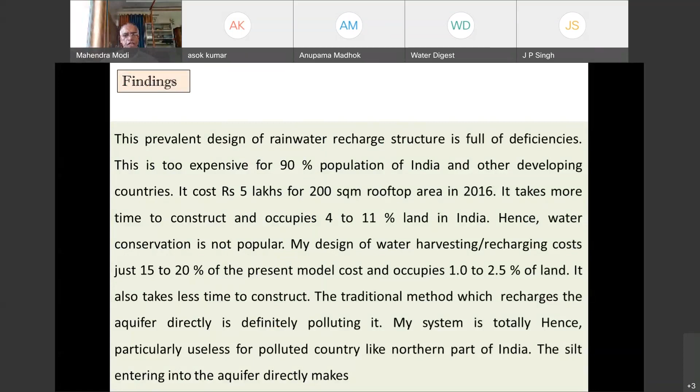But this has been prohibited by the Honorable National Green Tribunal and the Groundwater Regulation Act of different states. Why are there disadvantages of this system? What are the disadvantages?

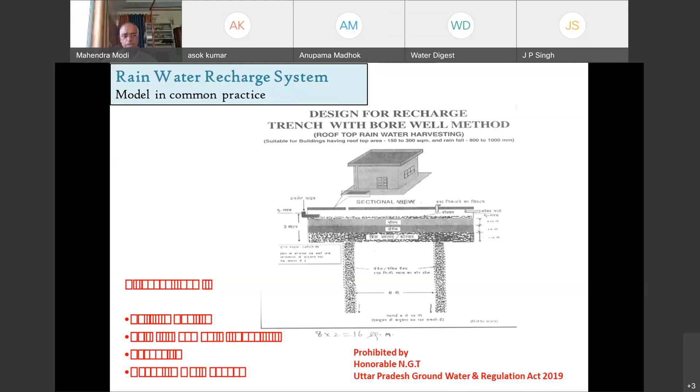In this system, I recharge rainwater only, nothing but rainwater. We recharge only rainwater. Where do we recharge it? The depth is 9.5 feet below. It's not recharged from one direction but from 5 directions. The rainwater recharges not only vertically downward, but also in all 4 horizontal directions outwardly.

This is possible by making the system in such a way, which I have developed after practical experimentation for the last 15 years or so.

Now, this system eliminates the possibility of making the aquifer polluted. It prohibits acid rain, harmful bacteria, any kind of bird droppings, any kind of insects, and any kind of soluble chemicals.

Now after that, whatever silt is deposited in this small chamber - there are two chambers. The small one, I have to desilt only the small chamber.

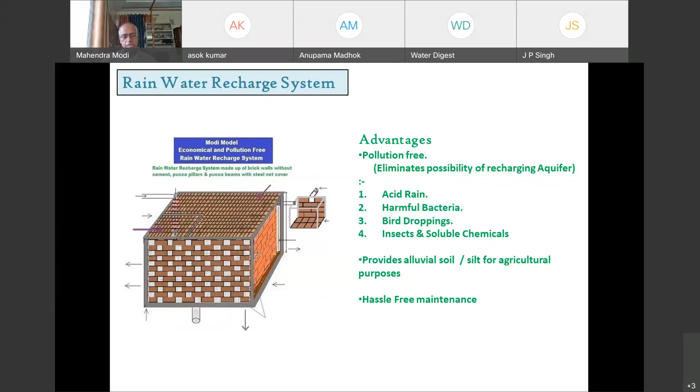These are practicals. Here on the left-hand side, you are seeing this - it is already functional at Police Enclave Vibhuti Khand, Lucknow, India. Now the main chamber is here, here is the small chamber, here is a chamber without using cement - it is made only of bricks. Bricks will be on the ground of the small chamber only. In the larger chamber, on the ground, there are many innovations.

Now you can see this water - this is the photograph taken in May. And in May and June also, the water level is 10 feet. It means if you take a bucket and add a rope of 11 feet, you can fetch a bucket full of water. So this is the level of water.

And this is not only in Lucknow, this is also in Jhansi and at hundreds, even 300s of places wherever I have started this model. Now on the right hand side is Mr. Ranjan Kumar, Divisional Commissioner, presently of Lucknow. And this system is again at Lucknow.

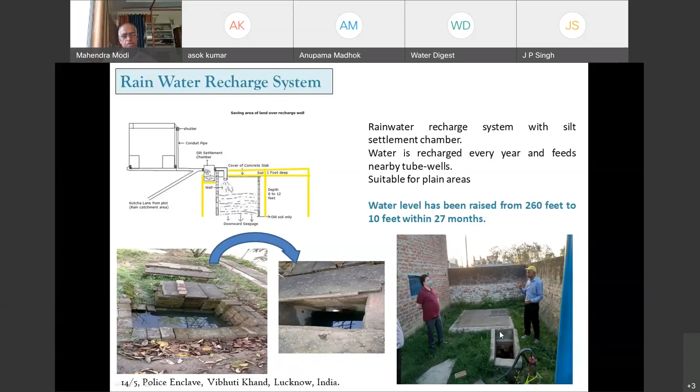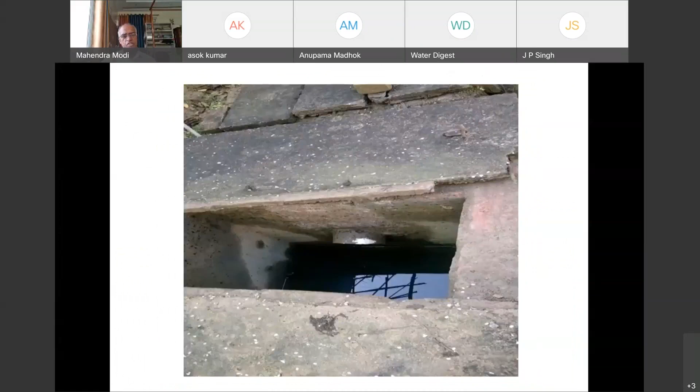And then we are coming to another model, that is in the Technical Services Headquarter, the Forensic Science Laboratory Headquarter at Lucknow, where in approximately 1,43,000 square feet area, I returned the government money, almost 45 lakhs back. And then just by Shramdan, within 15 days, we started 95% water recharging.

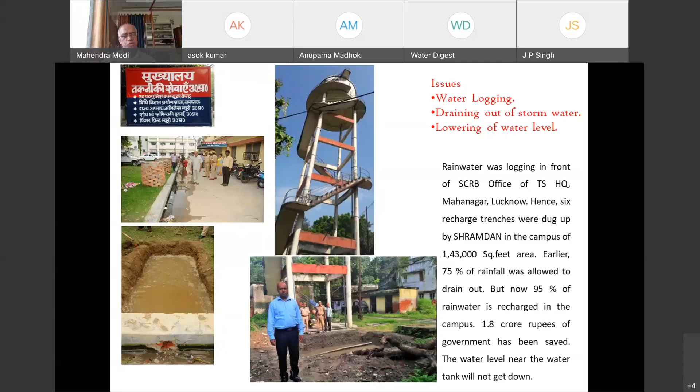This is Sakrar, Jhansi, Gausala, 15 acres of land that was barren. Now it is lush green just by recharging, with the help of Shramdan. So it can do wonders.

Then we have the system of wells revival. Another model I have is called Mahendra Koop, Maha Indra Koop. Koop means well, and Indra is related to the god of water. You can see this was a dead well earlier, now water has come up.

There are 3, rather 4 models, according to the composition of soil. In the Mahendra Koop model, there are 3 kinds of minor modifications, so according to plateau area, hilly area, or plain area, this varies.

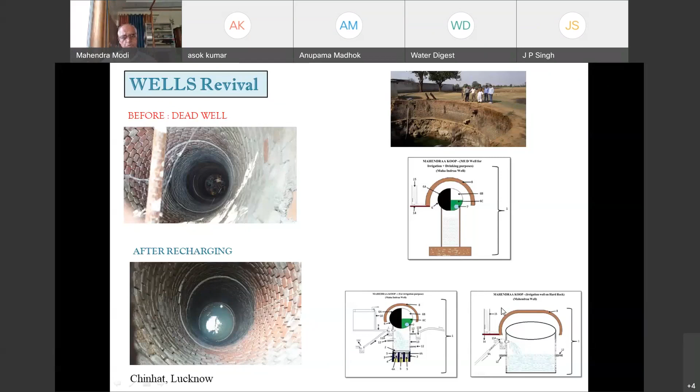You can see this well was dried up for almost 18 years. It got cleaned up, and after cleaning, this is the model. Then trenches were made around the well. This is the new revived well, providing water for all 365 days, and this happened in just one monsoon recharging.

Why this success? Why is one monsoon recharging sufficient? Because around the well, 3 trenches have to be dug up, and all the water in the lanes passing beside the well, after making bunds, the rainwater is stopped there and recharged into these trenches.

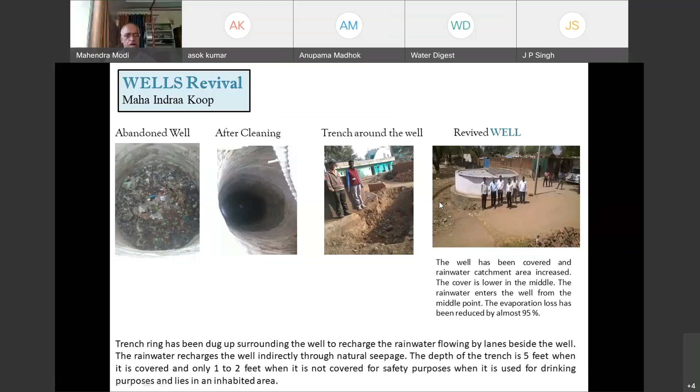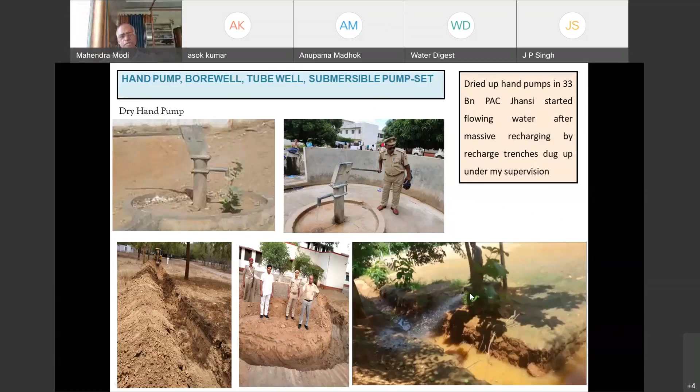Now, what precautions should we have while making a trench? The trench nearest to the well, nearest to the hand pump, will be almost 5 feet deep. But the added linked trench can be just 2 to 3 feet deep, and it should be able to stop all the runoff of rainwater passing through it. It will collect maximum time and recharge the nearest vicinity of the hand pump.

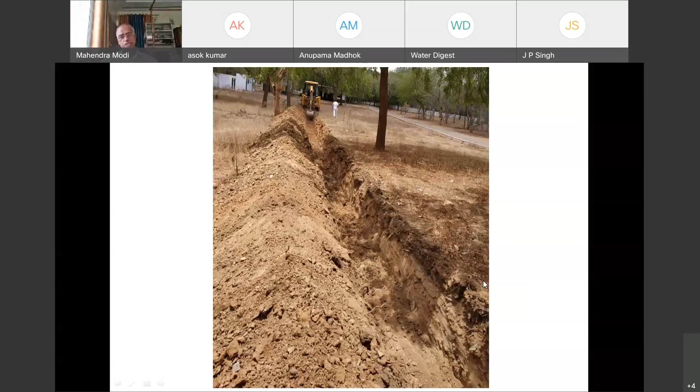There is Paris Accord signed in December 2015, dedicated to arresting global warming, reducing the temperature of the world by 2 degrees Celsius or 1.5 degrees Celsius as compared to the pre-industrial stage. Naturally, it is a huge, ambitious task, and this calls for cooperation from not only governments of India and states of India, but also of the world.

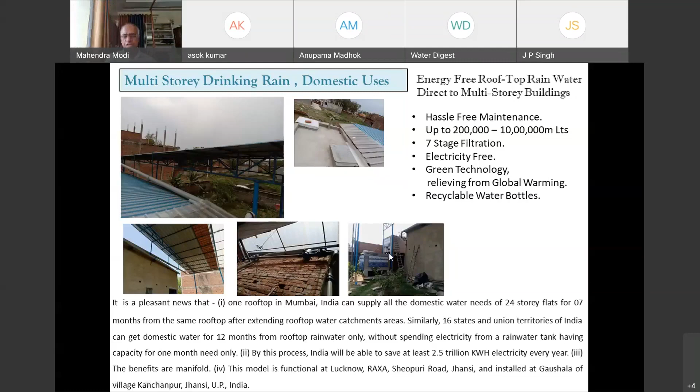हम यहाँ पर नेक्स्ट उसी को बढ़िया से दिखाने जा रहे हैं कि अगर मान लिया जाए, आप दिल्ली की बात करें, Delhi has an area of 1484 square kilometers, having an average rainfall of 61 centimeters per annum.

Now, if we see the population of Delhi to be around 2 crores or more, whatever water falls in Delhi, if we collect according to the advice and slogan of the Honorable Prime Minister of India, catch the rain wherever it rains, when it rains, then each and every citizen of Delhi should have 70% more water than he needs. Now, this model is my model in the sense that I will tell you...

Because we are not extracting groundwater, but with the help of gravitational pull, we are collecting it. These are the collection pipes. Then this will go to the water tank.

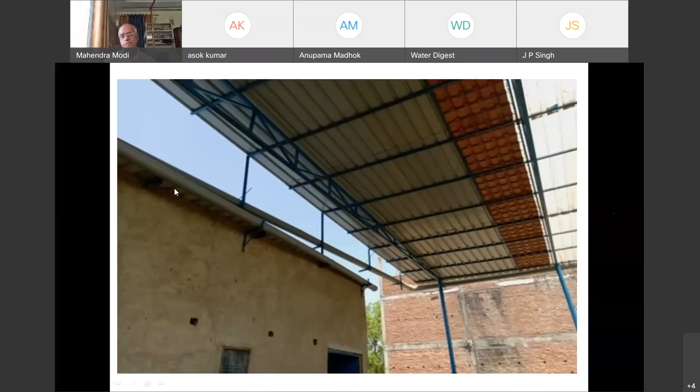Now, overhead tanks all over India have one design. And what is the design? The rainwater falling over the overhead tank goes waste to the ground. We do not collect it.

But here in this model, there are so many innovations. Number one, all the rainwater, that is 80% of the rainwater, because I have 3 parts in the tank, T1, T2, T3, 3 chambers of the rainwater tank. Now, chamber number 1 and 2, all the water falling over chamber 1 and 2, that is 80% of the falling rainwater, will also be collected inside the rainwater tank. And this is the tank.

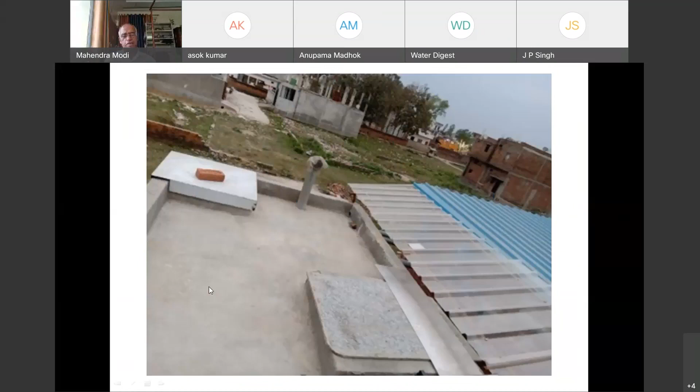Now, to give a closer picture of it, here is the rooftop of the rainwater tank. This rainwater also gets collected from this place. Before that, I throw out the acid rain, and I tell you here,

yes, this is the filter and valve. The valve throws out the waste drain also and dirty water. After that, 10 micron filters are there. Then after filtration, the water goes inside the tank.

Inside the tank, again, there are so many innovations, some to clean it further. Before falling into T3, that is tank number 3, again there is an FPO, that is a chamber having a sand filter, which is not needed, but a carbon filter is needed, so carbon filter is there. Thereafter, in the last stage, drinking water will be made after passing through the UV filter, that is ultraviolet filter. So here will be the ultraviolet filter, and then this is drinking water.

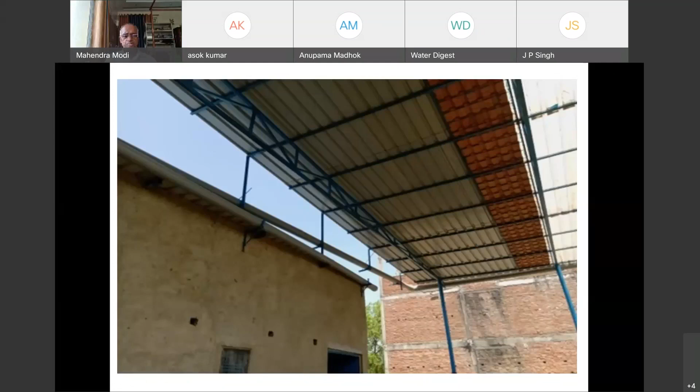The chamber has a capacity of 15,000 liters. That is the capacity of 1 month's water for one family, drinking water and all kinds of water. So here is a lesson for those companies who extract groundwater for making mineral water or bottling water. For bottling water, I am providing employment opportunities to young men.

This is the model. Just now, during the lockdown period, I have made and constructed it with my personal resources and with the help of some friends and some Shramdan also. So this will be drinking water in recyclable bottles. So it will be a totally green movement. And this has to be done and followed all over India.

Why all over India? Because if this system is applied in every building of India, it is applicable all over India or even all over the world. If we do so, in India itself, according to preliminary estimate, 2.5 trillion kilowatt hours of electricity will be saved.

Why am I putting emphasis on saving electricity? Because though the Honorable Prime Minister has made efforts for green energy and solar energy, even now 61.5% of electricity used in India is thermal power. Out of that, 53% is from coal, and coal is very polluting. We have to arrest global warming and pollution. This thermal power, especially coal, diesel, gas or lignite power, is adding to global warming, and we have to reduce it.

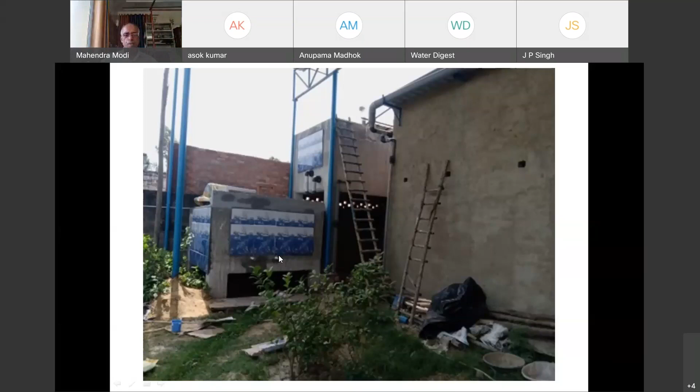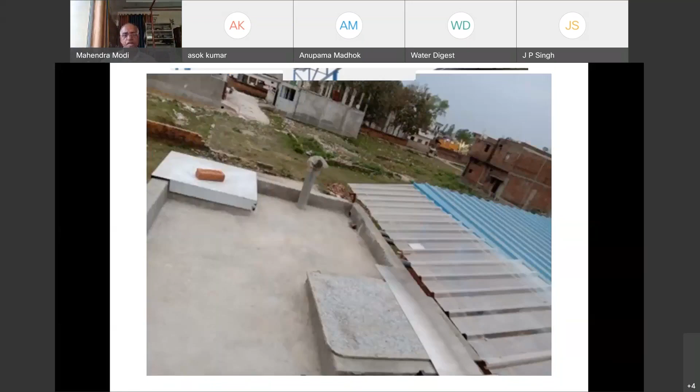Now I'm switching over to another model. One may raise the question that this is as good as RO water or distilled water. Agreed, but this is not harmful, and it's not tasteless - it's very tasty water. And if you want minerals, why not have natural minerals? We can have mineralization, but I'm not suggesting that, though it can be done.

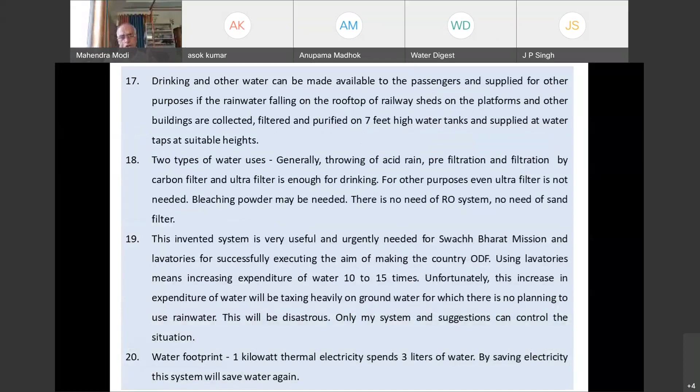Now, from experience, for each and every state, at least 40% of districts of India, if they adopt my model - suppose we are in Meghalaya with 15 to 37 floors - just by having a 15,000 liter or 1 month's capacity rainwater tank, you can have 12 months of water for domestic purposes.

I divide India into 3 parts for this purpose. Some will have 10 months, some 8 months, some 6 months of rainwater. And if we don't draw or exploit groundwater for those 6, 10, or 12 months, we will be saving and raising the water table.

So raising the water table of the ground is a precondition or prerequisite for the Jal Jeevan Mission to be a success. All the states have calculated how many months of water and how much electricity can be saved.

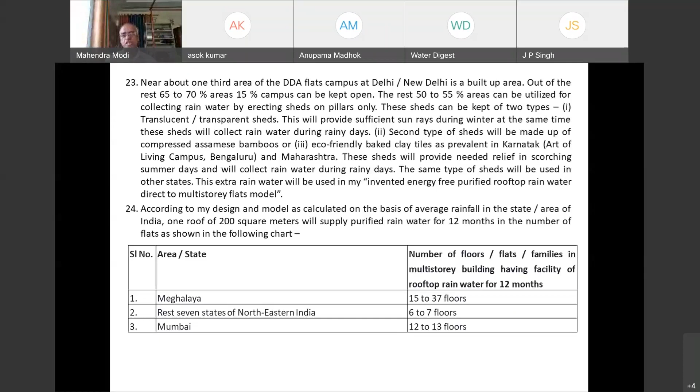And if you consider all over the world, almost 8 trillion kilowatt hours of electricity can be saved every year worldwide.

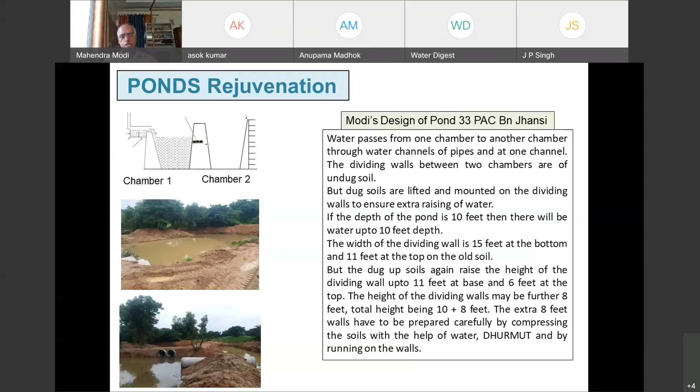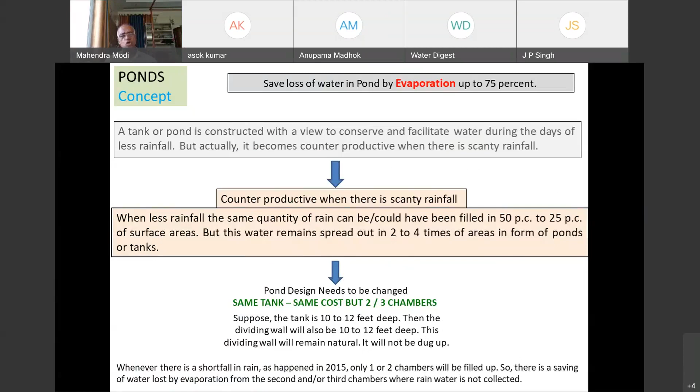So I'm giving you the advantages you can have. This provides rainwater desilting, storing and conservation system, which reduces the loss of water due to evaporation. Whenever there is less rainfall, this invented water conservation system reduces loss of water by evaporation. When rainfall is less, our actual water loss will reduce from 50% to 75%. A common man can build this quite well.

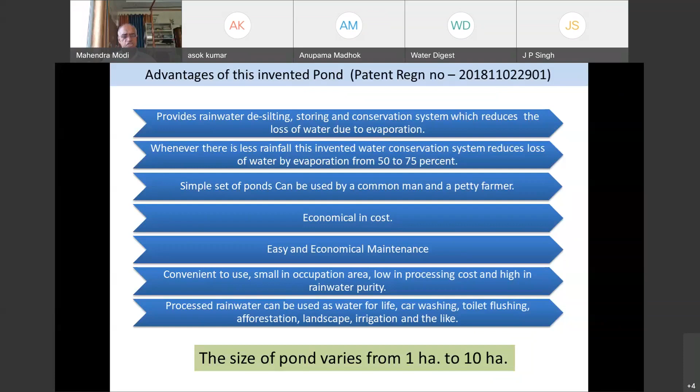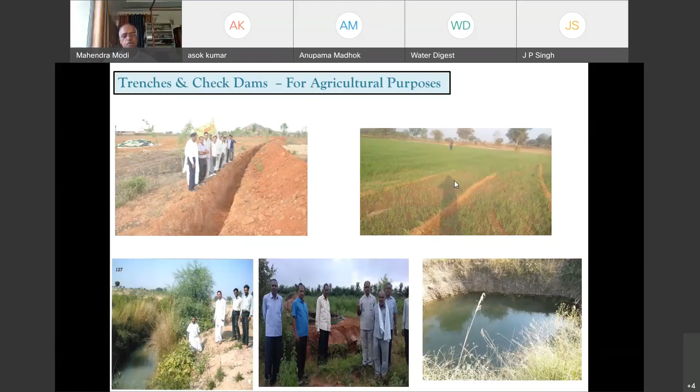The Laxmibai Medical College of Jhansi spans over 380 acres of land, and here is Principal Dr. N.S. Sengar. Seven years ago I had a presentation there, and after making trenches, now the campus is lush green.

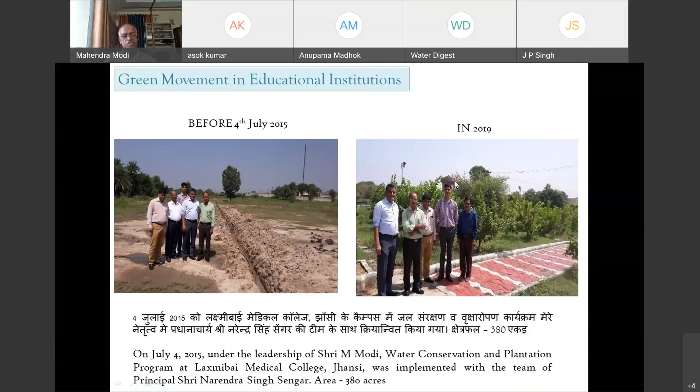There are so many examples across 4,700 acres of land. I also suggest that instead of having a bath with soap, have lemon baths.

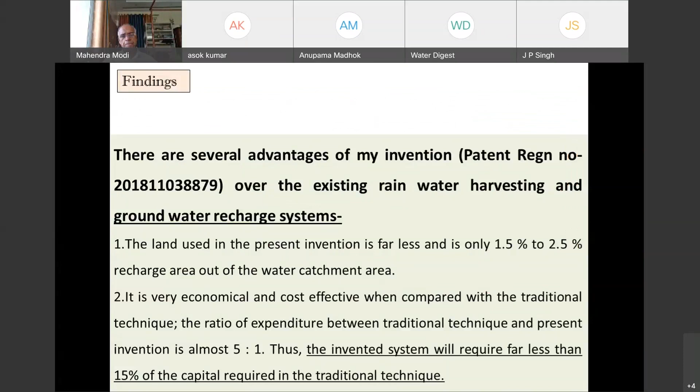Then we have Mr. Sunil Kapoor with us. We can have a common academy for training all the people of India for water conservation.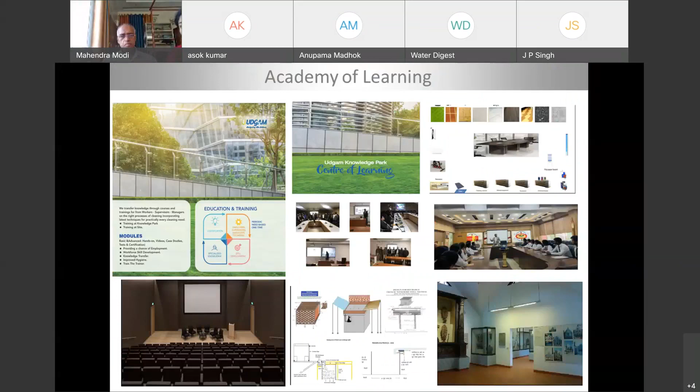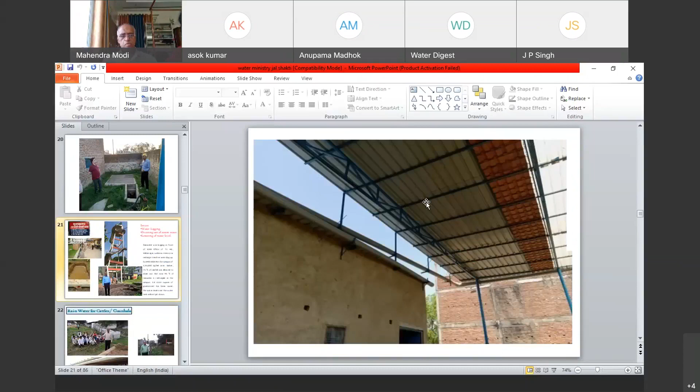Now I have some suggestions for the government as well. About the very straightforward ones, I have already told you.

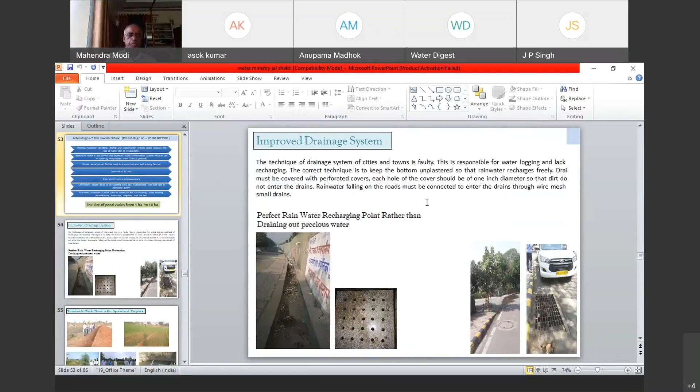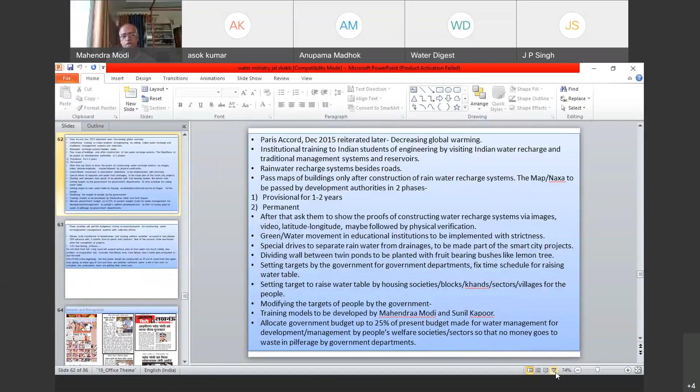Institutional training to Indian engineering students should have a change. All the rich traditional water harvesting and management systems built during the reign of Krishnadev Raya ji, Ahilyabai ji, and all the old kingdoms should be studied, be it Jabalpur or Bijapur or anywhere in India. But our Indian students are not studying it. That should be made compulsory as part of the educational curriculum. Then, a rainwater recharge system beside the roads, as part of the smart city, must be undertaken.

When we have rainwater recharge system provisions in buildings, some states require it for 200 square meters, some for 300 square meters compulsory. But this so-called compulsory rule is only on paper, because after submitting the map and getting it passed, people forget to make the rainwater recharge systems in their homes.

So what should we do? There should be some changes. The passing of maps should be a two-phase event. First should be a provisional map for 1 or 2 years. Second will be the permanent map. After you complete the rainwater recharge and harvesting system during the first year or maximum 2 years, only then will your map be passed permanently. This provision must be introduced in every state of India.